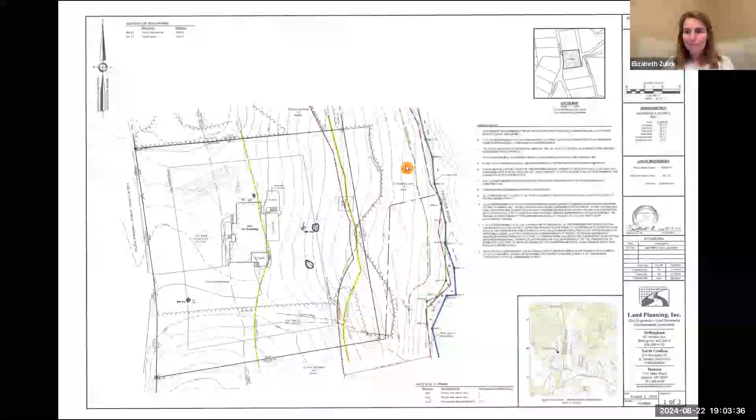I didn't catch that, Melissa. Did you say you wanted to share a screen, or would I be able to share a screen? You're more than welcome to. Right, let me. All right, can everybody see this? Yes, yes. You guys see that? Yes. All right. One second, I seem to be... be very quiet. Can you hear us okay? Can you guys say something? Seems to have muted once I shared the screen. We can see your screen. We're here. We'll just go through this. Can you guys still hear me? Yep, we can hear you.

All right, so the proposal is to construct, as stated, a pool, patio, and pavilion. Sheet 1 is an existing condition plan for the property. This is the dwelling that exists on the property. There's an existing patio that exists that will be removed and replaced in more or less the same location as the proposed pool. The resource areas of interest are on the easterly edge, a named perennial stream, Angelica Brook, a BVW next to and adjacent to the high water mark of that bank, in addition to the 100-year FEMA Zone A line in red.

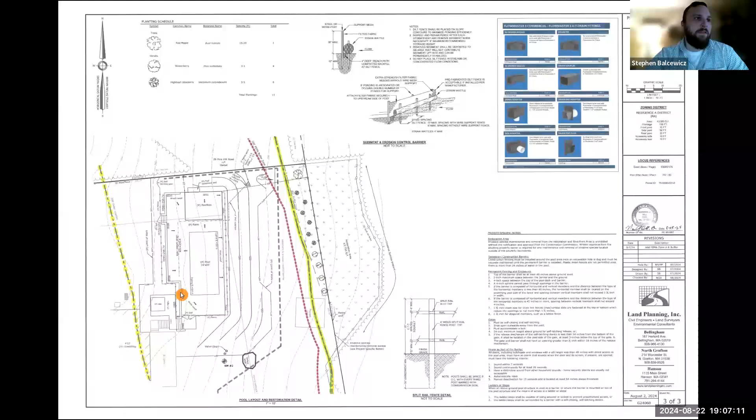If we move over to sheet 3, we have provided a detail at 10 scale, more detail on the pool and how the pool runoff generation will be handled, and also the limit of work around this area.

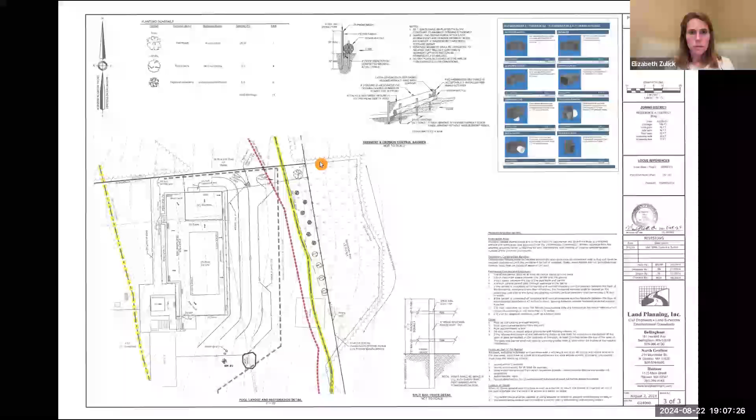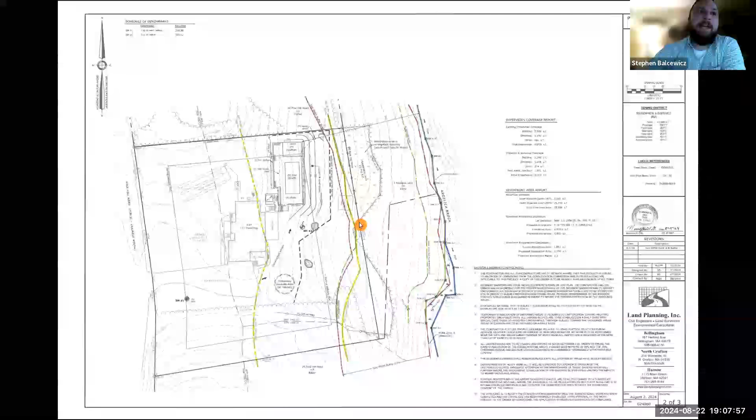Being that it's in the riverfront, we have provided on sheet 2 riverfront alteration calculations, and we have exceeded the value allowable by 1,800 square feet. To mitigate this, we propose to allow this area, which is currently lawn, to revegetate naturally, and we propose a split rail fence along the property line to delineate that area. The detail on sheet 3 also provides a planting schedule for this area, which is the restoration area on our actual property, and all the areas off our property will just be allowed to revegetate naturally.

I will stop sharing my screen.

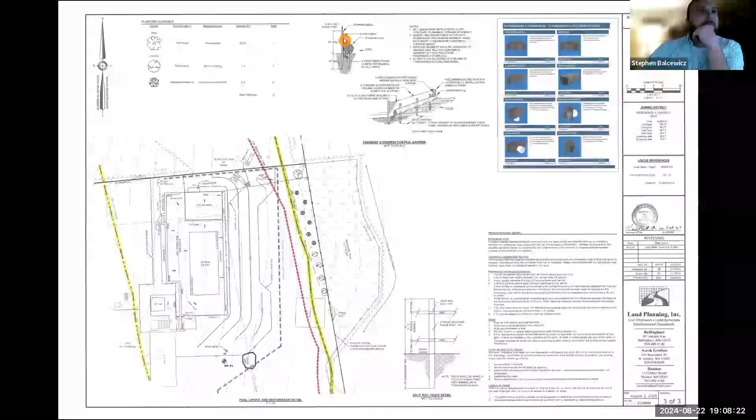And if anybody has any questions at this moment, I would be happy to answer them. Thank you very much. Does anyone in the commission have any comments or questions?

Sherry? Has Lucas looked at that? Yes. I did have one, yeah. Seems to have a problem with my speaker. One moment.

Yeah, you guys can hear me, right? Yes. Oh, all right. There you are. It seemed like when I went to share my screen, it changed my source for the speaker.

Elizabeth, I believe you had a question. I think Sherry has a first question, and then we'll go to Lucas Environmental and Joe to see if they have any comments as well. Hi, Stephen. Just to wrap my head around it, the parcel that you're proposing the restoration on, who owns that?

So that area actually gets kind of a gray area. If you go back in aerial images all the way to when the property was developed, there was a stockade fence going around this area, and I believe it's Angelica Way that went in following that. A lot within that subdivision gets its frontage from this area. So it is actually owned by a property that has an address on, I believe, Angelica Way. So it is an abutter to the property.

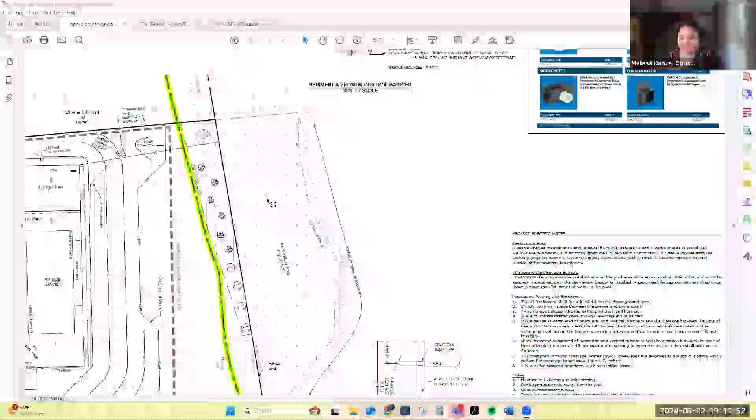Okay, so it's basically not mowing anymore. Correct. Thank you. Correct.

I will also note that the applicant and property owner have displayed an interest in discussing this vegetation back there. It is actually invasive species, and where it is off the property, they can't actively manage that without authorization of that property owner. So they were going to be in talks with the neighbor to possibly discuss removal of invasives and management of that.

Primary concern we had, which I told the applicant, was that if we let this area revegetate naturally, invasives would just take over naturally. So we've talked to them about really managing this area, but it also needs to be coordinated with the actual property owner that owns it.

I'm going to go to Lucas Environmental. Joe, do you have any comments? Have you been able to review? Yeah, I did get a chance to go out and look it over. I took a look at the delineation.

As was noted, there's some pretty thick invasive vegetation down along the stream and up to the tree line, and I was in agreement with the flags. There was just one bank flag at A9 that I thought was about 4 feet low. That may be because the branch it was attached to fell down over the edge of the bank, since it's a pretty well-defined bank. So it's possible that the location on the plan is correct and that the flag in the field just shifted because of a branch falling down.

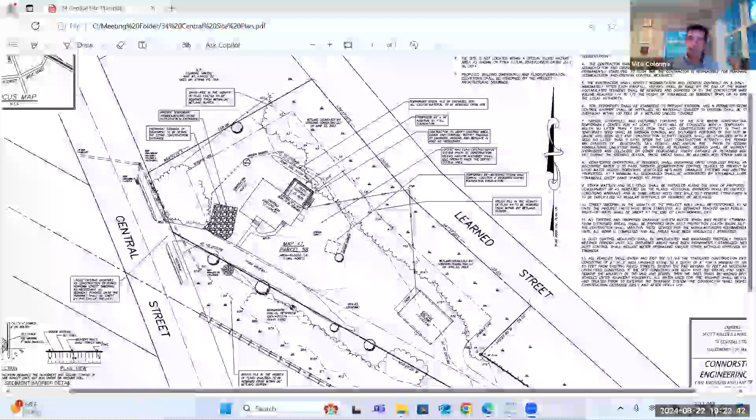We showed that during the foundation excavation, they would temporarily do a windrow of soil stockpile. Once the foundation's complete, they backfill it and anything excess gets taken off the site. We also added a note that overnight storage of equipment, like the backhoe, get moved up to the front to sit on the construction entrance, so it's not in too close proximity to the wetlands, and it's got a stabilized area to sit on overnight.

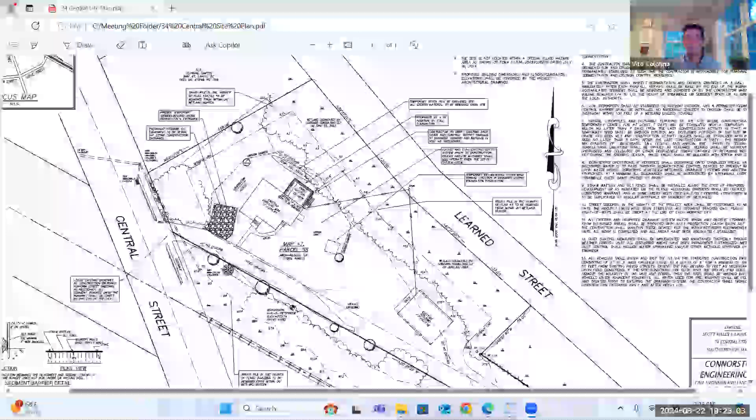Those are all the revisions we made. I guess I can hand it back over if there are any outstanding questions.

Thank you, Vito. Do we have any questions from the commissioners? Hearing nothing—oh, Kevin, go ahead. No, I was going to say I think you got everything we talked about last time.

Anything outstanding on the Lucas side of the house? It appears that all of our comments have been addressed.

I will open up for public comments. Don't see any hands. All right.

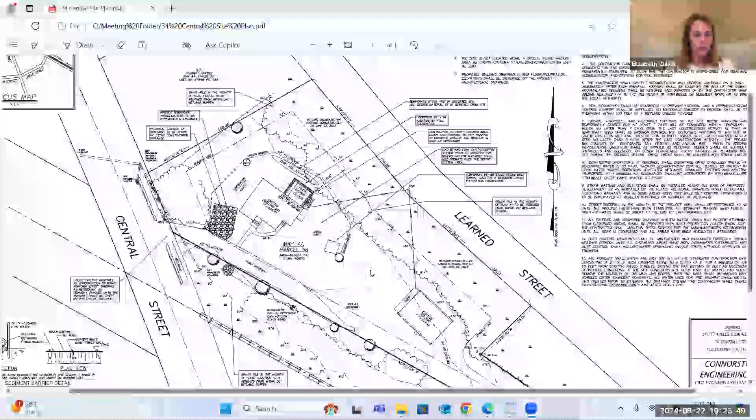I will move to close the hearing for 34 Central Street. So moved? Second? Barrington, yes. Upton, yes. Wittes—can I vote on this, Melissa? I would abstain, or no, I so abstain. And Zulik.

I'm going to move to issue an order of conditions for 34 Central Street. So moved? Second? Barrington, yes. Upton, yes, and Wittes is abstain, and Zulik, yes.

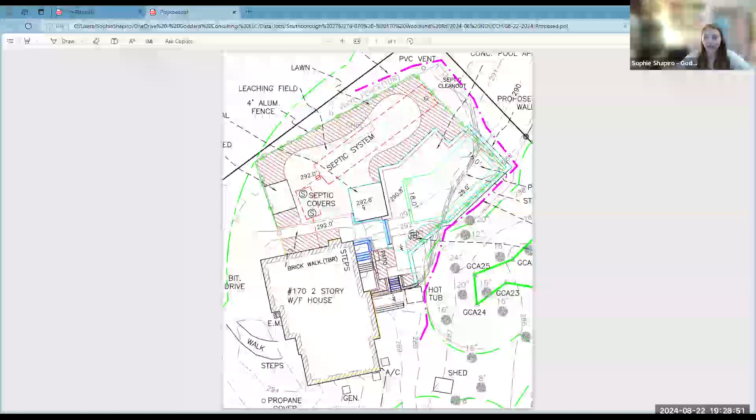The package also includes narratives and documentation describing the proposed dry well, and the history of the shallow marsh stormwater treatment system, along with a bylaw waiver request for the removal of the existing retaining wall within the 20-foot buffer zone, and proof of abutter notifications and submittal to Mass DEP.

In summary, the applicant is seeking an order of conditions for the revised application. Can I address any questions?

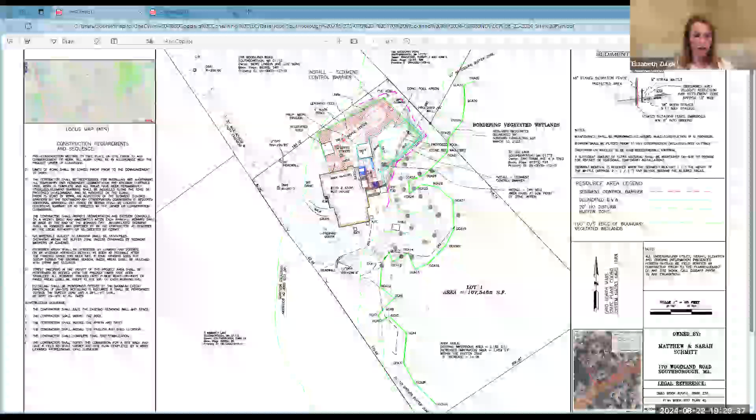Thank you. Any questions from the commissioners at this time? Anything remaining unanswered? Hearing nothing, going to go to Lucas Environmental. Joe, anything to add here? Nothing to add. It appears our comments have been addressed.

Great, public comments? Don't see any hands. All right, so I'm going to move to close the hearing for 170 Woodland Road.

Second? Farrington, Yes. Upton, Yes. Wittes, Yes. Zulik, Yeah. All right, so I'm also going to make a second motion to issue an order of conditions for 170 Woodland Road, with our standard specials.

Farrington, yes. Upton, Yes. Wittes, Yes. Zulik, Yes. Perfect. Sophie, I'll probably get this over to you tomorrow, in the morning.